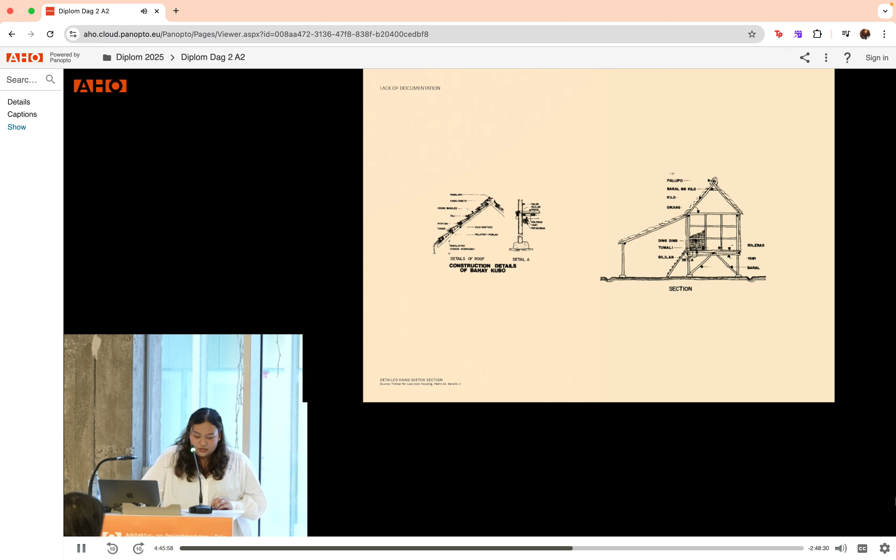And the last background of the project is the lack of documentation. While some documentation of these traditional typologies exists, there is a significant gap in detailed records of their construction processes and techniques, hindering a full understanding and preservation of these methods.

These housing typologies lack the traditional touch and are largely inaccessible to most Filipinos, primarily due to affordability. Therefore, I began exploring alternative solutions for more affordable housing, drawing inspiration from traditional housing designs like Bahay Kubo and Bahay na Bato.

Bahay Kubo is a cube-shaped one-room house on stilts with wide eaves, a high roof, and a bamboo structure, often thatched with dried palm or grass. It represents the earliest form of housing in the Philippines, often situated in rural areas. The Bahay Kubo has regional variations across the Philippines, shaped by geography, materials, and local needs.

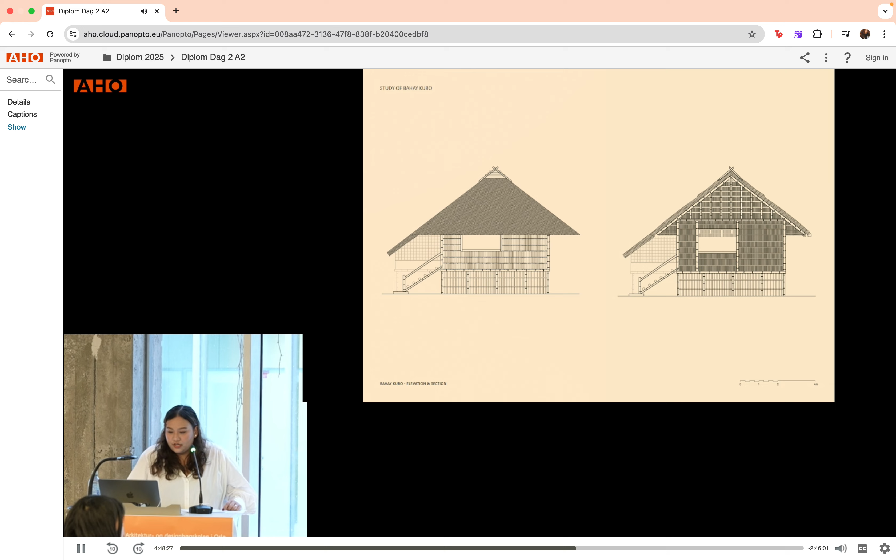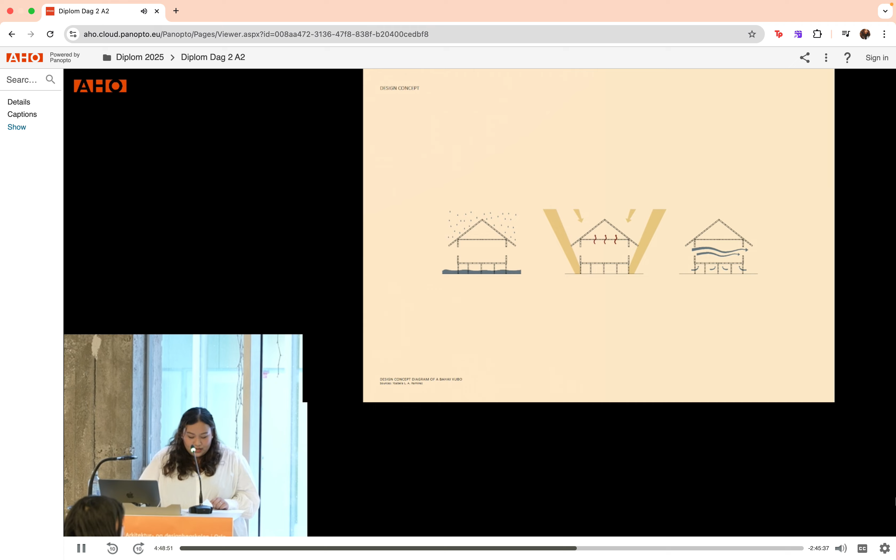For the design concept, there are three main concepts: it is elevated on stilts for flood protection and protection from wild animals, a steep roof and wide eaves for protection from sun and rain along with better air circulation, and an open light wooden structure that allows for natural cooling ventilation.

Building techniques: as said earlier, there was a lack of documentation of how the Bahay Kubo was constructed. Therefore, when I studied it, I looked at drawings and pictures, and these are the results of those studies. At first, I looked upon bamboo.

Bamboo is a well available material in the Philippines, therefore it is the material mostly used in building Bahay Kubo. It's very important to study the cuts and how it is used, and the joints as well, how it's connected.

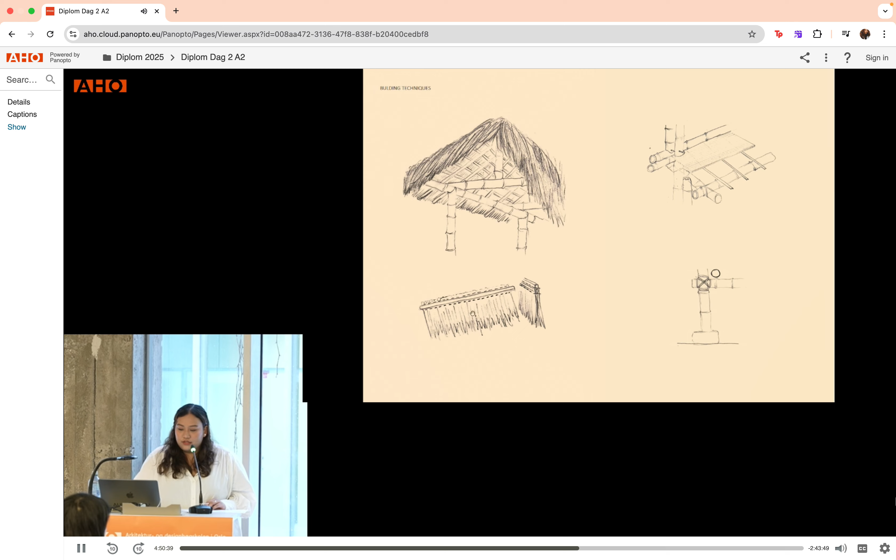So these are the different techniques, from the layering of the nipa grass, and this is how the roof is made using either dried nipa grass or kogon grass, and the floor and the foundation.

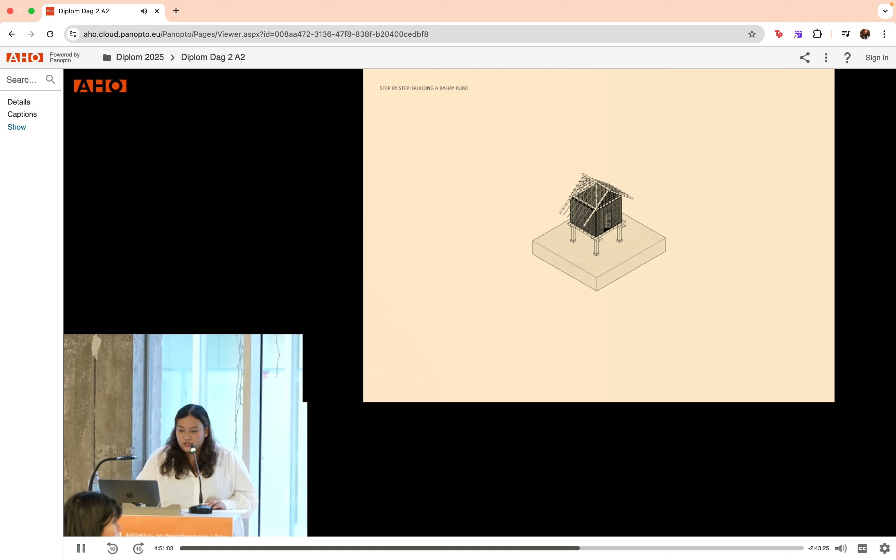And this is the result of that study, where I tried to stay as true to the technique as possible, weaving the walls, layering the roof, and working with bamboo. And now, going to Bahay na Bato.

Bahay Kubo's simple structure was vulnerable to natural calamities in the Philippines. When the Spaniards colonized the country, they saw an opportunity to create a more resilient design, leading to the invention of Bahay na Bato. Bahay na Bato blends European and Southeast Asian cultural styles.

Stone or brick walls provide durability against natural disasters, while the wooden upper structure ensures ventilation for tropical climate. Emerging during the Spanish colonial era, the Bahay na Bato symbolized wealth and social status, showcasing Filipino elites' association with colonial authority. These are the different parts of Bahay na Bato: the living room, the receiving area, the main staircase, and the windows and balconies.

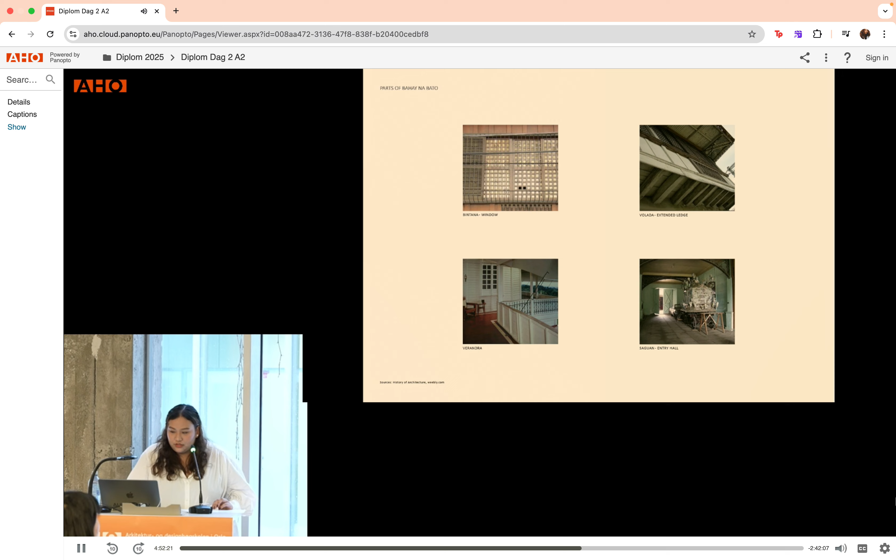There are two different styles of Bahay na Bato. The first one is geometric, mostly with symmetrical windows often framed with capiz shells made out of oysters, and geometric patterns like spirals and diamonds. The other style is the traditional style called floral, reflected in intricate carvings, paintings, and woodwork with floral motifs, often inspired by native Philippine flowers.

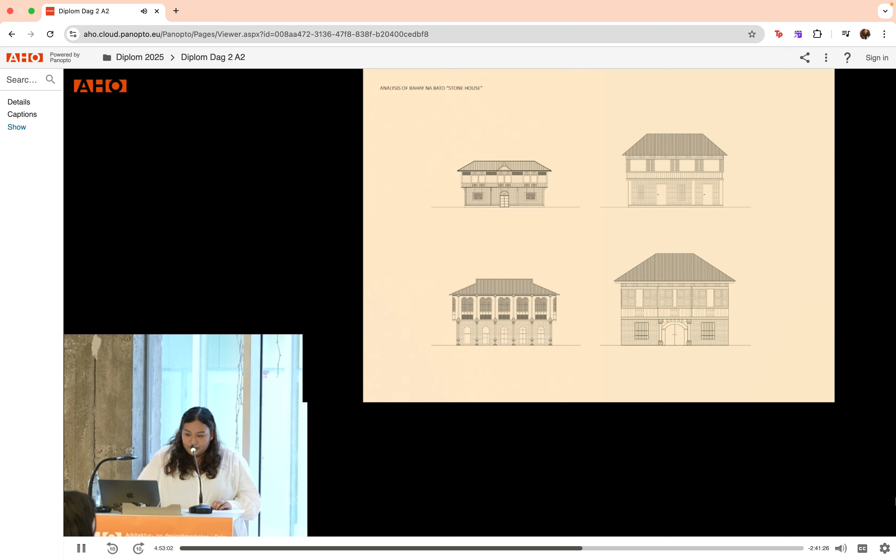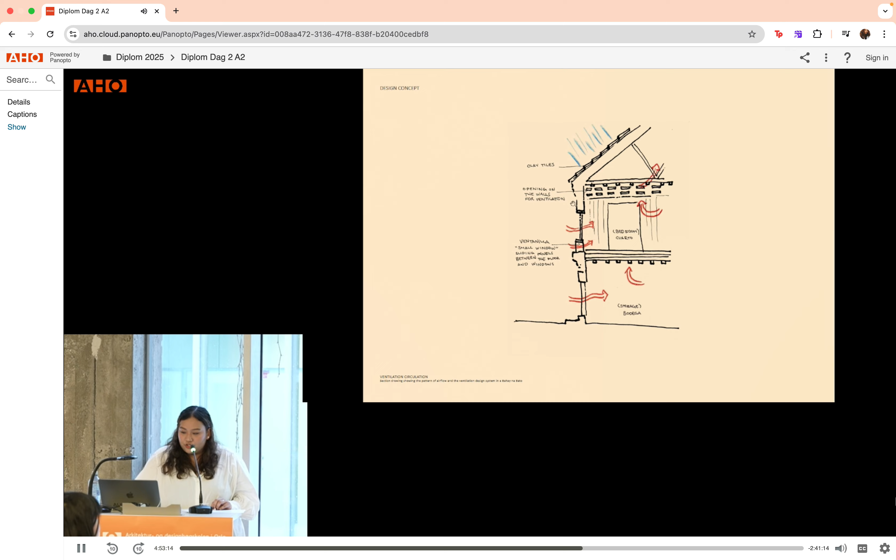To sum up, the Bahay na Bato is a fusion of European and Filipino design, with a focus on ventilation and circulation for better airflow to accommodate the tropical climate of the Philippines, which they adjusted in exterior walls and interior walls as well.

The first floor of the Bahay na Bato is made out of solid concrete or stone walls to elevate the light wooden structure, while the second floor is the light wooden structure with focus on ventilation, where the main program of the house is located.

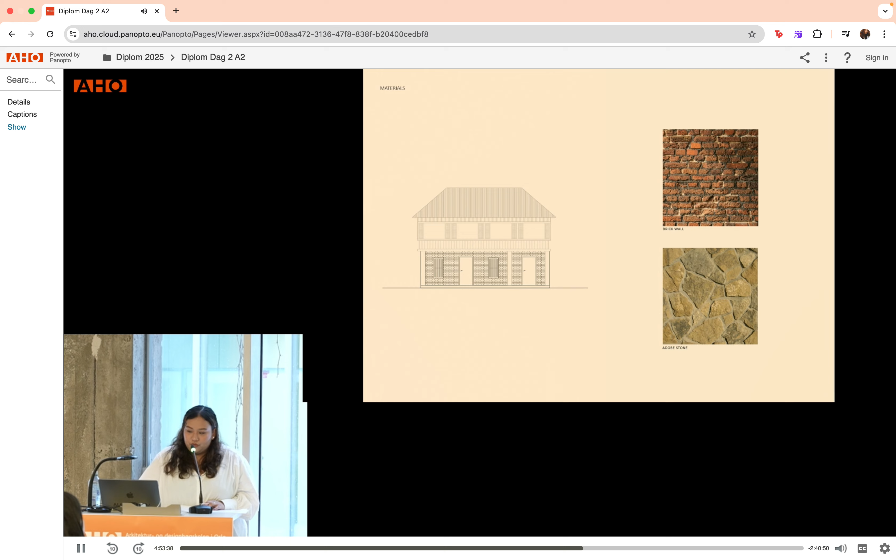These are the materials used: in the foundation and roof, they use clay, and in the main living area, this is the capiz window made out of oyster shells. They also use stained glass and narra wood. Narra wood is the strongest wood the Philippines has, so that was the most common wood available.

For the Panibagong Bahay, Panibago means new or adapted, Bahay is house. So, summary from each typology: Bahay Kubo is mostly about simplicity, functionality, and sustainability, whilst Bahay na Bato is elegant design, durability, and climate adaptability.

The analysis of current issues that need improvement: structural durability, disaster preparedness for flooding and earthquakes, adaptability for urban context, and accessibility and scalability.

So what are we taking from Bahay Kubo? Materials such as bamboo, nipa grass, lightweight structural elements, and elevated design highlight the simplicity and resilience of naturally sourced resources. The use of these materials reflects a practicality and sustainable approach to construction.

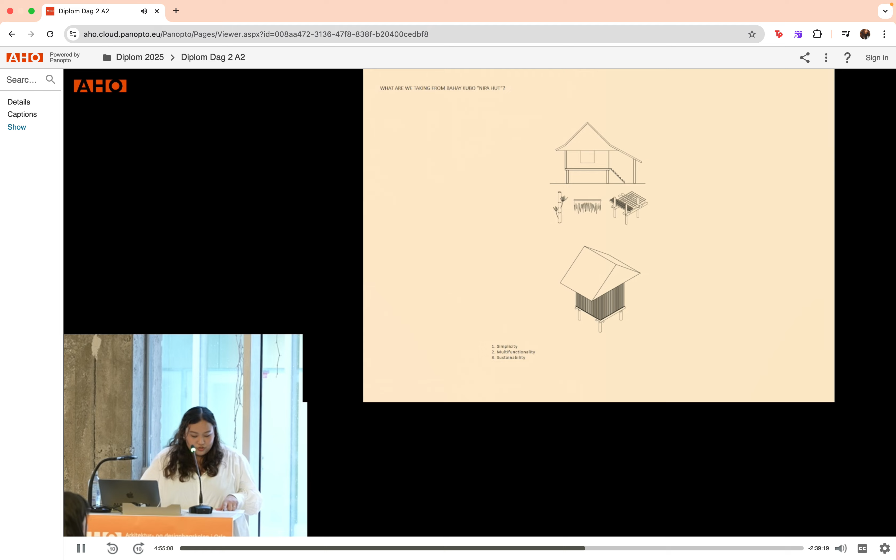And what are we taking from Bahay na Bato? The ground floor's solid structure, crafted from stone, bricks, and concrete, ensures durability and resilience. Complementing this are the capiz shell windows made from oysters, which we take further into the suggestion for the future design.

The Panibagong Bahay, my proposal for the new Filipino housing typology. It combines the spatial efficiency and environmental harmony of the Bahay Kubo with the structural durability of Bahay na Bato. This design integrates modern materials like treated bamboo, steel connectors, and reinforced concrete to improve disaster resilience, an elevated foundation to protect against flooding, while the open layout maintains a communal spirit central to Filipino living.

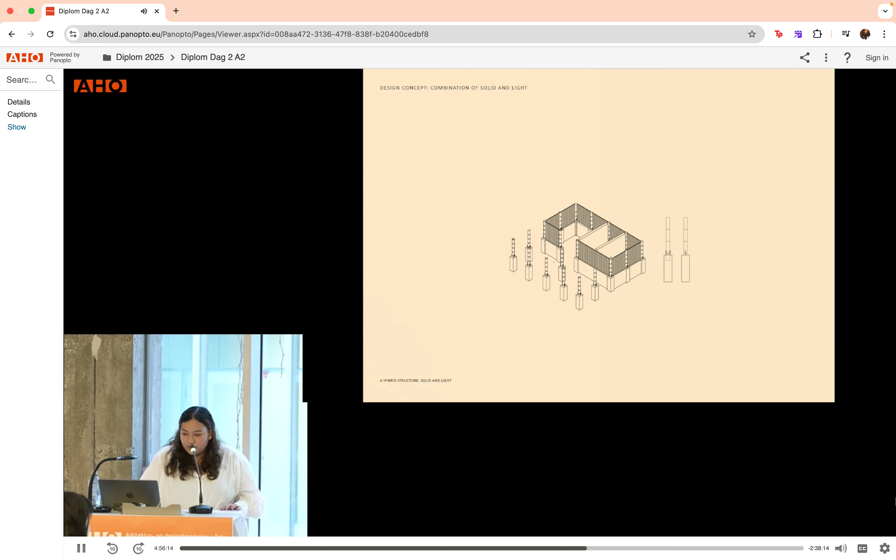The design concept: concrete footing embedded with steel timber connectors, with a solid foundation made out of stone or brick walls to hold the lightweight structure. This is what it looks like. The reason for the steel timber connection was for it to be detachable and mobile, a design concept that enables the structure to be detached from its concrete footing and relocated as needed.

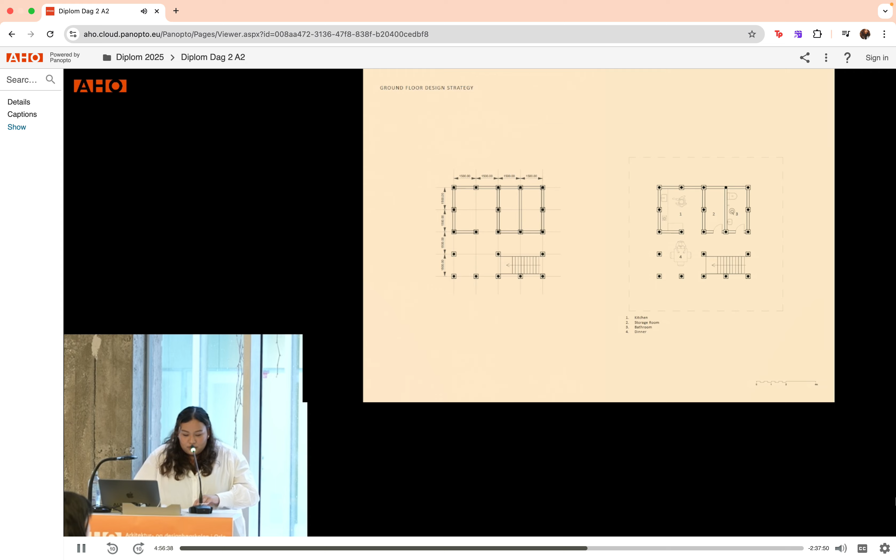Floor plan design strategy: a column structure with 1.5 spacing to stabilize the building. The ground floor houses the outdoor kitchen, dining area, storage, and bathroom, with all wet zones located here. The second floor is the lightweight structure of bamboo or timber. This area is mostly private, where the living room and sleeping quarters are designed to be flexible and adaptable to the needs of each family, inspired by the multifunctional layout of Bahay Kubo.

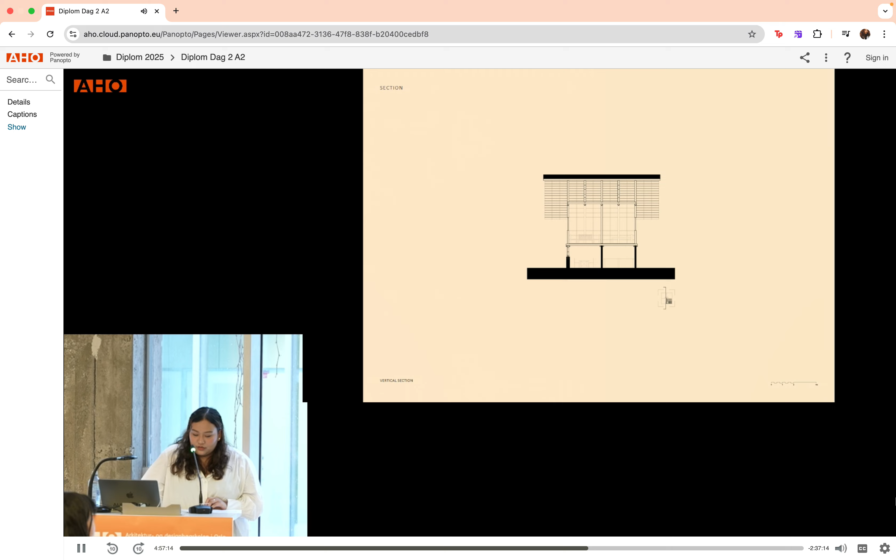This is the vertical section and horizontal section that also shows the balcony.

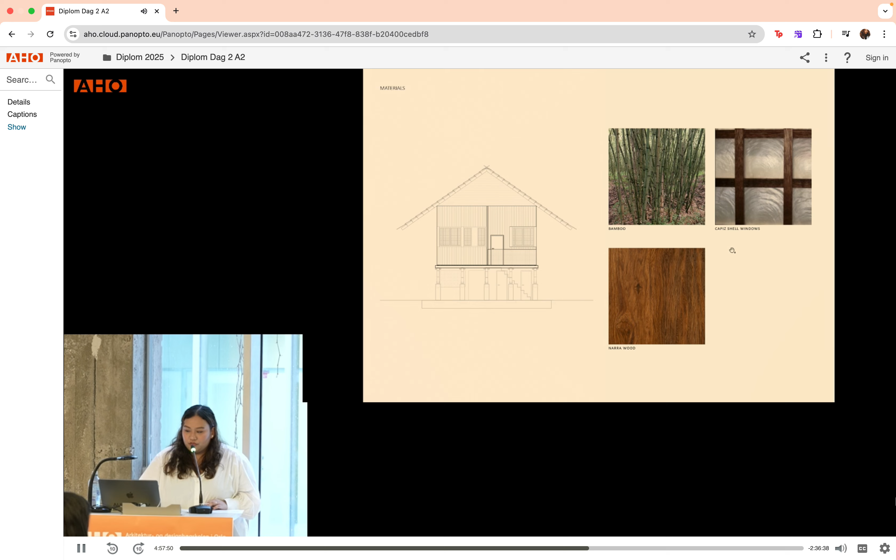These are the materials I was thinking of using for the new design. For the foundation, I would implement concrete and stone or brick construction, and for the frame, we have bamboo and wood. For the main house, we would still continue with bamboo and narra, with the introduction also of capiz shell from Bahay na Bato. For the roof, we have nipa grass, bamboo for framing, and a suggestion for a metal sheet roof.

It was very important, upon studying the building techniques, to identify what needs to be improved.

To improve the house's ability to withstand flooding and earthquakes, I have studied various foundation types for future designs. The key principle is to elevate the wooden structure off the ground to prevent moisture contact. Reducing column spacing and incorporating bracing support is also crucial for improving the Bahay Kubo design.

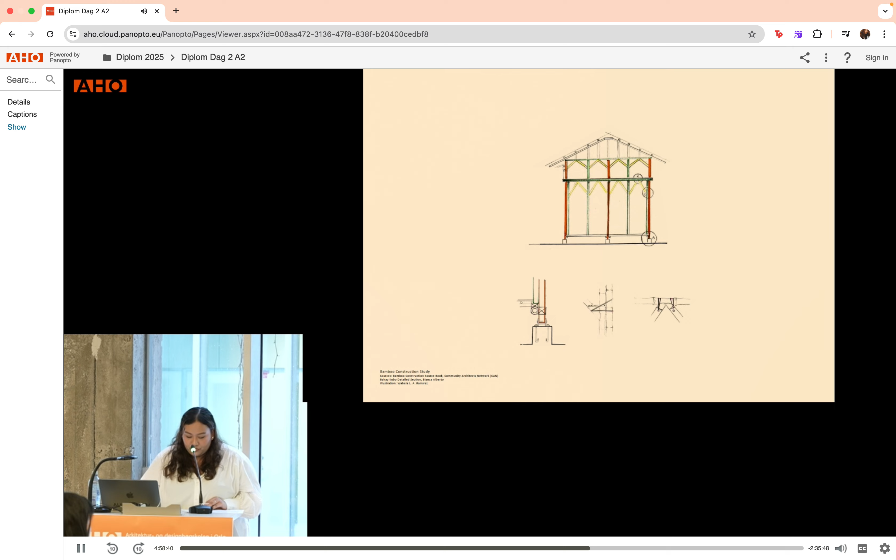And I've tried to implement these learnings through model making as well, scaling up the size of Bahay Kubo.

Design suggestion one is an adaptive hybrid structure. This design combines wood and concrete for a versatile, relocatable ground floor. Concrete or stone walls elevate the wooden upper structure, protecting it from moisture and flooding. A nipa grass roof adds cultural authenticity while enhancing ventilation and temperature regulation. The hybrid design balances stability, flexibility, and environmental adaptation.

Design number two is a semi-open robust design, inspired by Bahay na Bato. This design features a partially open ground floor with solid walls and one-sided mix of concrete footing and wooden posts. The roof uses lightweight, cost-effective metal sheeting. This is the more effective, affordable suggestion.

In conclusion, Panibagong Bahay envisions a future where Filipino homes are affordable and sustainable, culturally rooted yet modern, and resilient to climate changes. This vision is not just about building homes, it's about empowering communities to preserve their identity and thrive despite adversity.